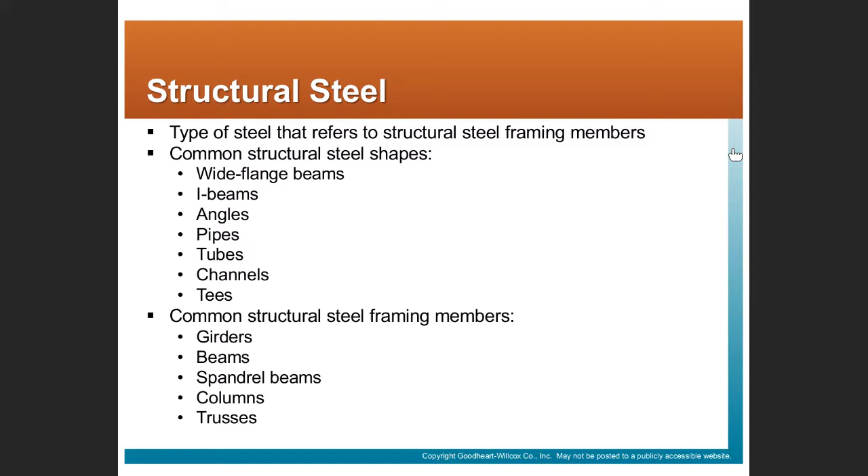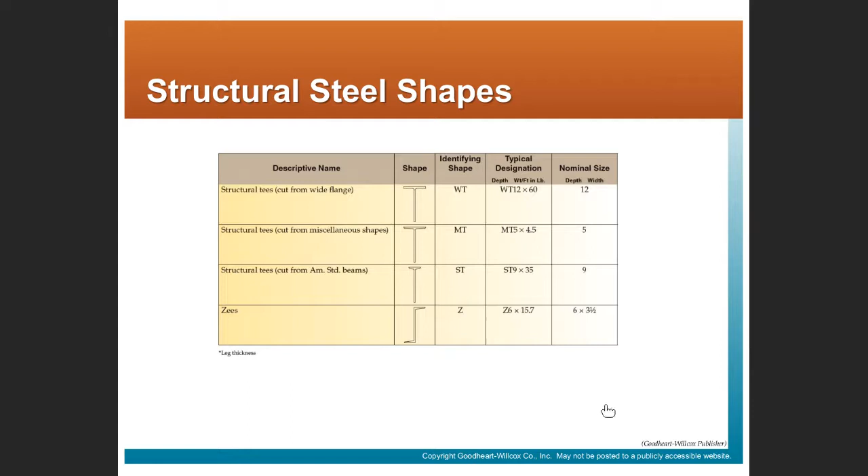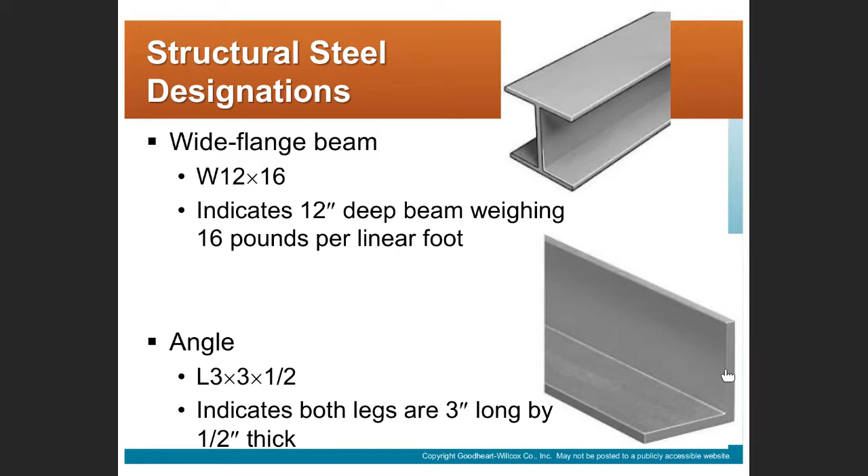Okay. Again, more structural steel shapes. Again, I think we picked this out of Unit 7. T's, Z's, L's, right? Different shapes. Right, so here's some examples. Our W12 by 16, a wide flange beam, 12 inches deep, weighing 16 pounds per linear foot. Or an angle, L3 by 3 by half, right? 3-inch long legs, half inch thick. Again, each of those will have different uses and different properties.

Right, so again, here's our three-dimensional lattice of steel members, right? Just like we talked about with concrete. Floor loads are transferred to beams. Beam load is transferred to the column. Column load is borne down to the footing or the foundation. The footing or foundation is bearing on soil or bedrock, depending on what we're doing. So again, we want the building to hold itself up and to bear the weight of whatever we want to put in it. So we need to transfer loads down to a firm foundation.

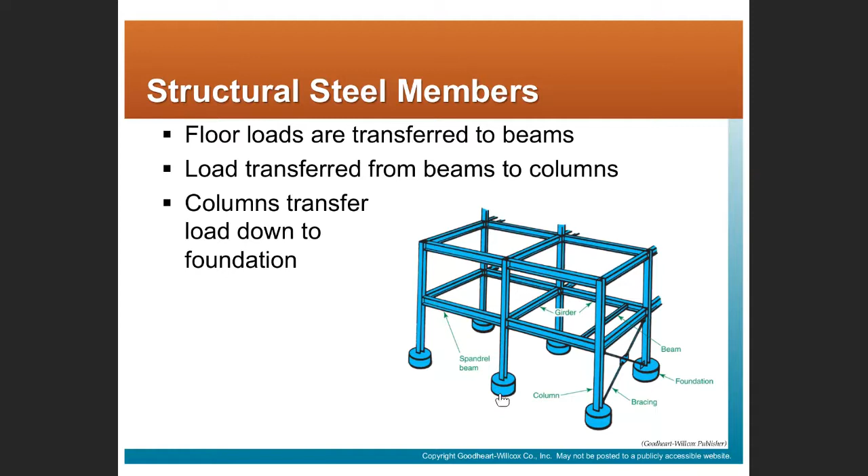You see some pictures in figure 11-22 on page 199 of open web steel joists. Right, so these are things that are used in either floor or roof structures. Again, I think when we were looking at the Delhi wall detail, we saw an open web steel joist bearing on that concrete block wall.

And this says supports loads more efficiently than wide flange beams. What that generally means is that we're using less material. We're supporting the same load with less steel, less weight, less cost. And those joists can either be top bearing or bottom bearing. We'll see what that means in a minute. It means that either the top member or the bottom member is what gets connected to the supporting column.

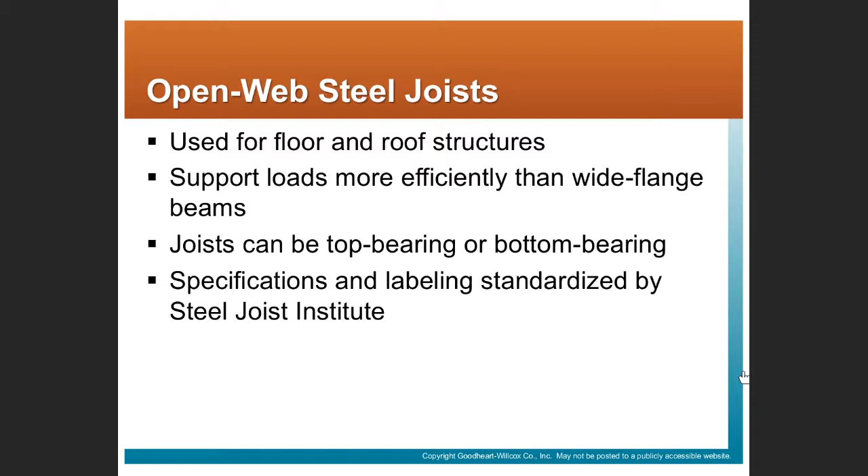Again, here, this is figure 11-22 in the book, right? Top bearing, right? This would be the part of the beam that bears on structure, the top of the top member, as opposed to this joist where the bottom member is bearing on structure. So this is a top bearing or a bottom bearing.

And you also see from here that the joists also have pitch to them, right? Who remembers why we had pitch in the roof joist in Delhi? We were probably looking at something like this, a top bearing joist. Why would we have pitch in a roof joist? Well, we have pitch in a roof joist to give pitch to the roof structure to convey the water away, right? Remember when you looked at Delhi, we had a pitched roof joist going to scuppers along that wall. I forgot which direction it is, but that's why there would be pitch in an open web joist.

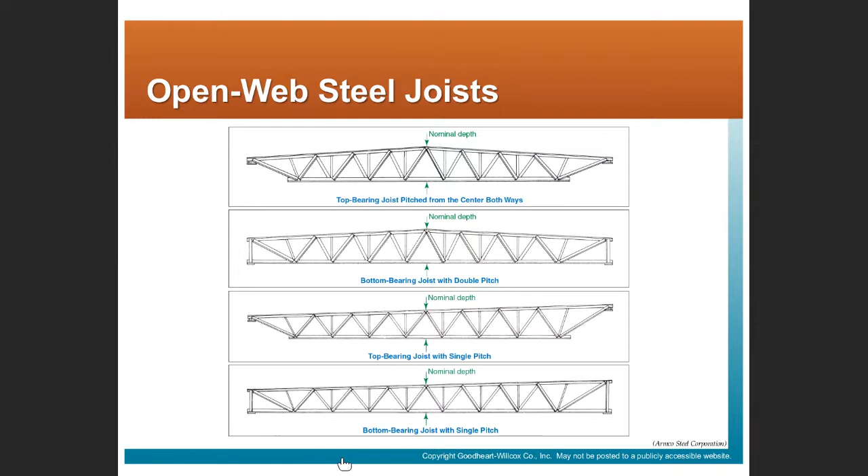Right, so here's an example of a top bearing steel joist made up of different members that are welded together, right? This is done in a shop or in a factory. So this member would come out on a truck and get lifted up by a crane and be erected.

Right, here's another example of a top bearing steel joist, in this case bearing on an I-beam of some sort, Nicole, whether that's an S, an M, or a W, I'd have to look up. But again, here's a top bearing open web steel joist. On the other picture, back one more. So you see where it says bearing member? Yes. It appears that you have the I-beam, but then coming perpendicular to that is something else.

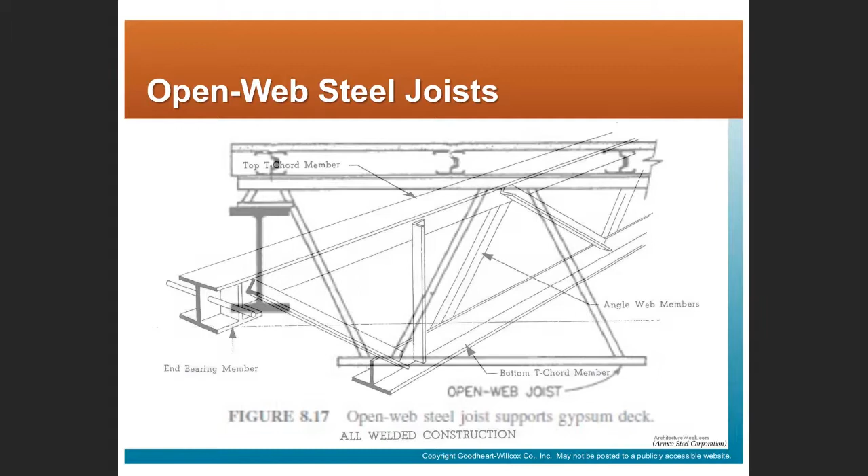If you go to engineering school, then you would learn about this, and you have to do calculations about which of these members are in compression and which are in tension. A lot of complicated stuff if you want to be a structural engineer. Otherwise, as an architect, in all likelihood, you're going to either go to your structural engineer or you'll look in a table that says this particular steel shape has these characteristics. It'll bear this load at this spacing, at this length, just like we would do if it was a piece of wood, right?

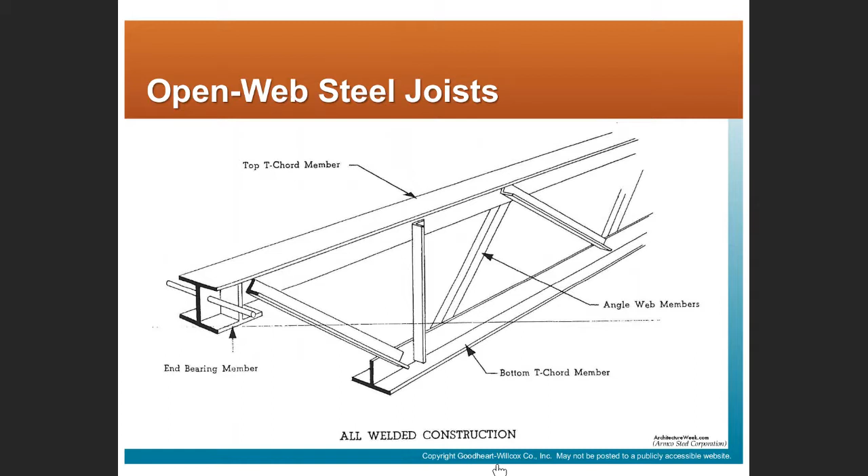Conceptually, it's the same thing. It bears a certain load with a certain center to center spacing with a certain span. The concepts don't change, it's just the materials that change. Right, so here's an example of top bearing open web joists, in this case bearing on this steel member here, probably some kind of I-beam.

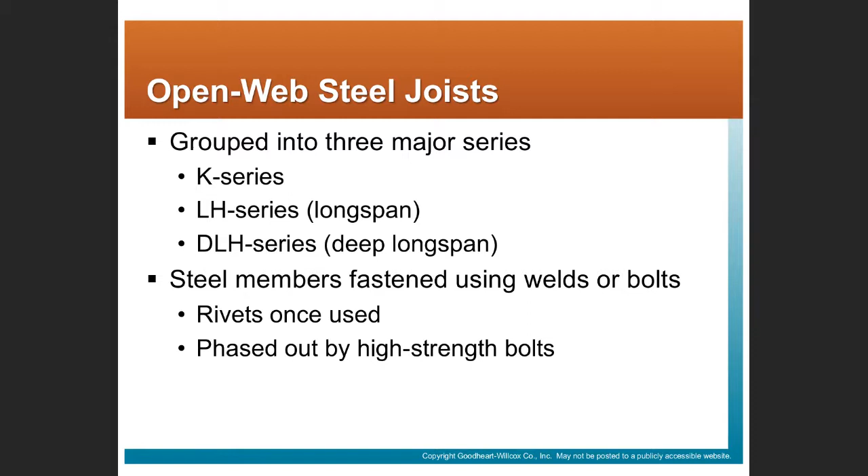Right, we have different designations of those open web joists, right? K, LH, or DLH, depending on the span. How does this get put together? Things can get put together with either welding or bolting. Again, we have different steel members that all have to be assembled together and held rigidly in place.

Here are some examples. We're now on figure 11-23 on the bottom of page 199. You see how these pieces are coming together in wall section L. You see the K joist bearing on this W section beam, and leaning up against this precast wall panel.

And on top of the K joist, we have a steel deck with concrete that's poured on top. It looks like this is the top of a mezzanine floor, so this would be a system that's giving us a floor.

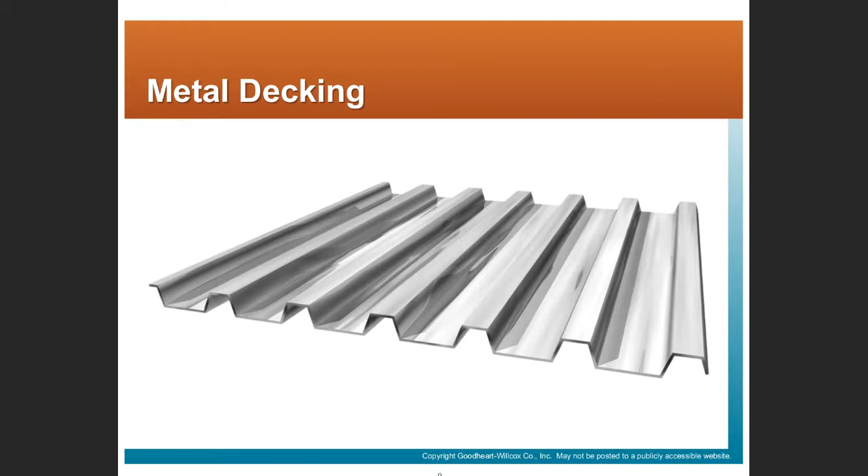So here's metal decking used in combination with open web joists and concrete. Again, this is going to be a typical structural system in a steel building, where we have this thin concrete floor slab poured on top of the steel deck that's supported by the open web joists bearing on this steel I-beam, which ultimately is bolted or welded to a column.

Here's a picture of pouring a concrete floor slab over metal decking, and you can kind of make out the welded wire fabric here, the reinforcement. So there is some reinforcement in this concrete slab.

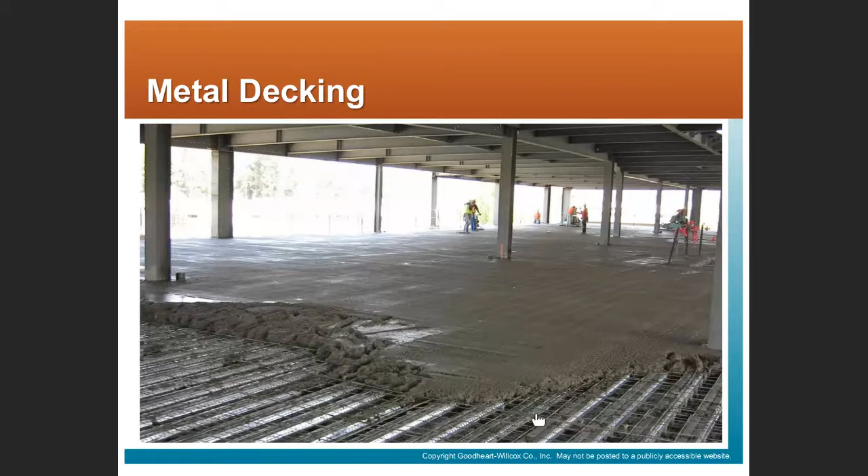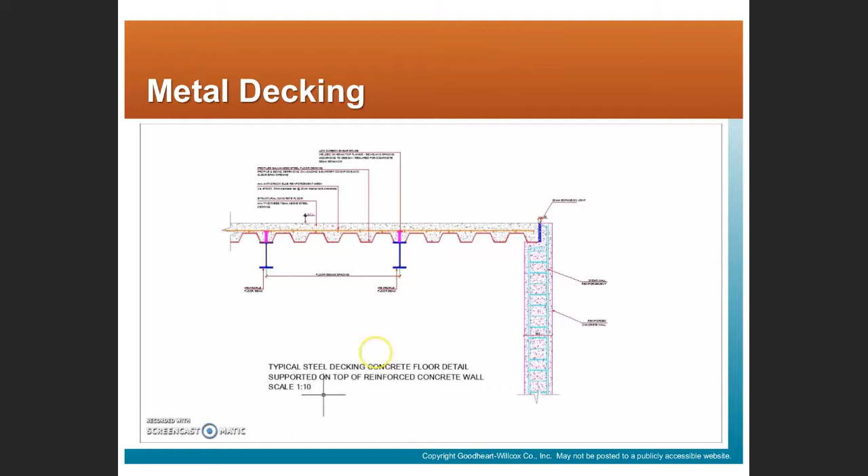Another typical detail. Another picture again: open web joist, metal decking, bearing on a steel beam, which bears on a column. Okay.

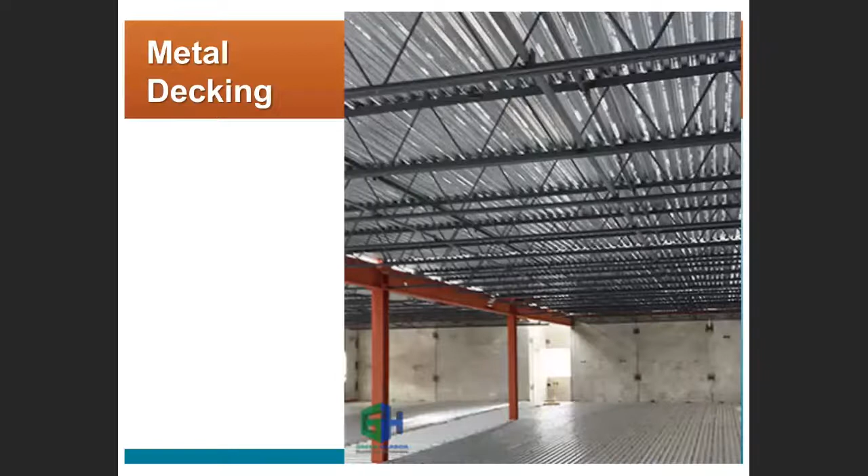First of all, any questions on figure 11-23? Yes. What is that EQ on section B? What does that EQ stand for? It looks like it was referring to the CMU blocks, but I'm not sure. Yeah, I think they're saying equal. The way I would interpret that is the number 4 rebar. It says number 12 CMU with...

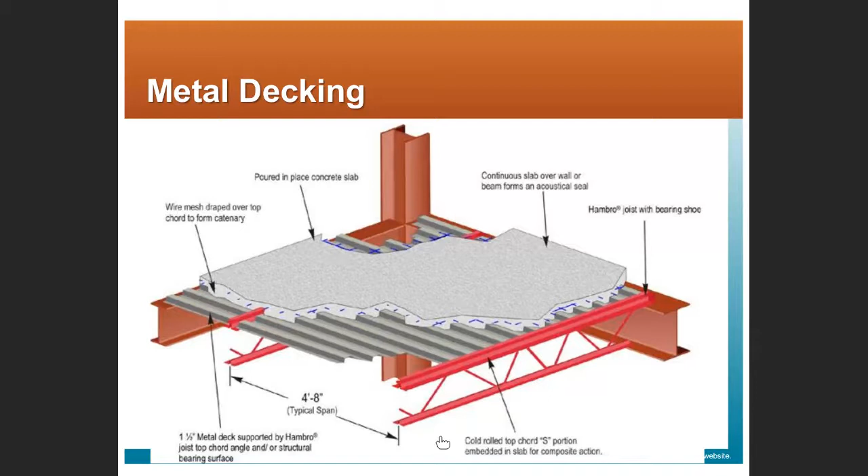Again, the art and the science of building is advancing. We're holding up loads with less and less material. We're trying to get the material out of our buildings through all these different techniques. Materials add cost. Materials add embodied energy. We're trying to get both of those things out of our buildings.

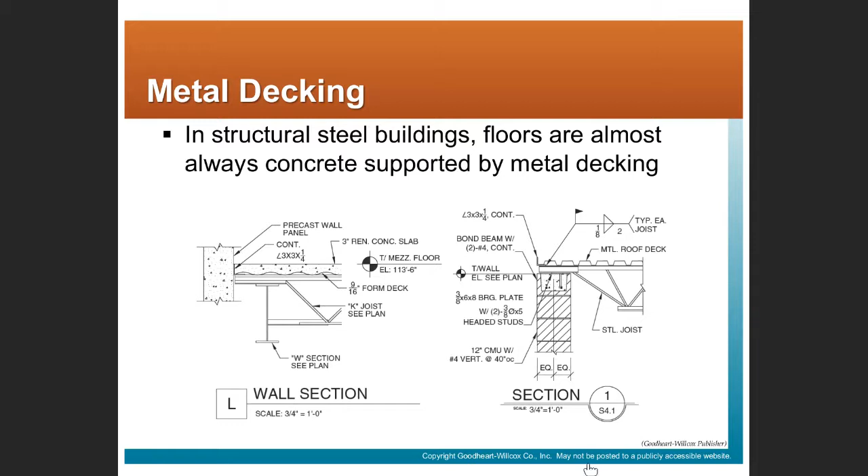But obviously we, as the designers, have to think carefully about what we're doing. And all the tradespeople executing this have to execute according to plan to achieve the result that the designer was looking for. Okay, any other questions?

Let's do this. I'm going to divide you up into teams. This is activity 11-1. We'll spend maybe 10 or 12 minutes on it, so we might get 6 or 7 questions that you have a chance to work through, and then we'll finish it up at the beginning of Thursday's class.

So hopefully you have our old friend sheets from Delhi, except now we're going to be in the structural sheets. So this will be Del 16 to Del 22. We'll get back together here in 15 minutes or so and see how much progress we've made.